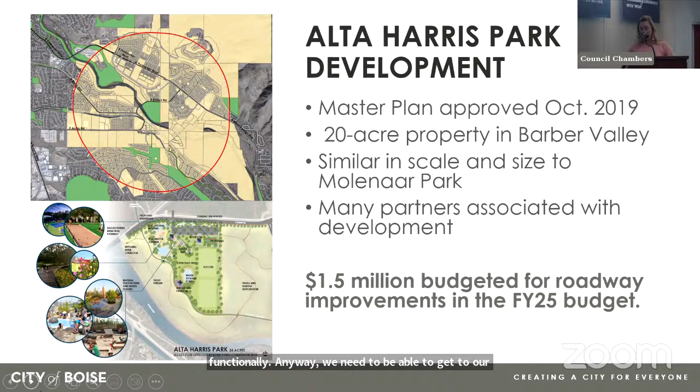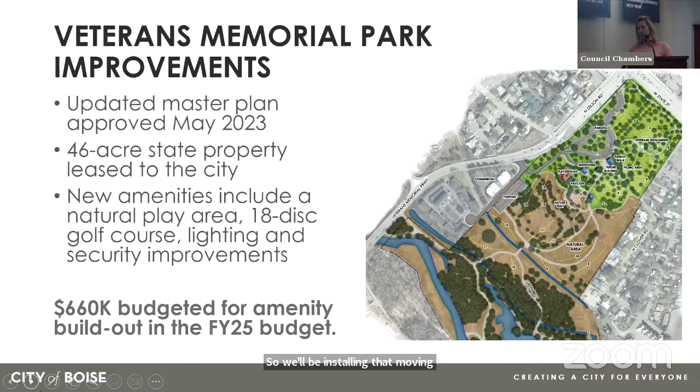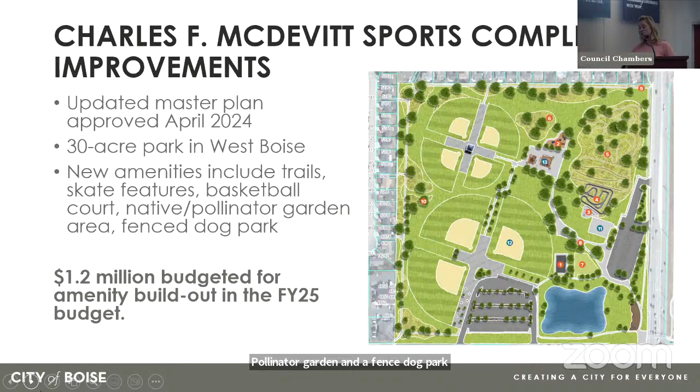And on the major R&M side, the major repair and maintenance or enhancements of existing parks, we identify those priorities based again on condition or age of infrastructure. Fairview Park has one of our oldest playgrounds. It's hard to get replacement parts for this playground because it's no longer manufactured. So we will be replacing that 20-year-old playground, both of them actually, and improving accessibility to the site.

That's one of the other things we would like to do moving forward with any enhancement, is looking more holistically at these amenities to make sure that everyone can access them. So accessibility and inclusion elements will be added not just to the playground, but around to the courts and around to the bathroom. So we're really looking forward to this improvement. It's a lovely park, and I love investing in our existing parks.

And I went through that kind of quickly. It's only 10 minutes, so I apologize if I was too fast. I'm happy to answer any questions you might have.

Madam Chair, just a question for you, Sarah. A quick update on Peasley, maybe, and on the Goddard Street Park that are under construction now, and an update for the commission on where those are at.

Yes, they are both under construction now, and I am accessing information. Hold on a minute. I'll start with Goddard. The pathway has been poured, and we are putting in some of the seating elements. And with any of these projects, we always run into challenges. So my team's working really hard to work with the contractor to make sure we get what we asked for. But they're both progressing really nicely.

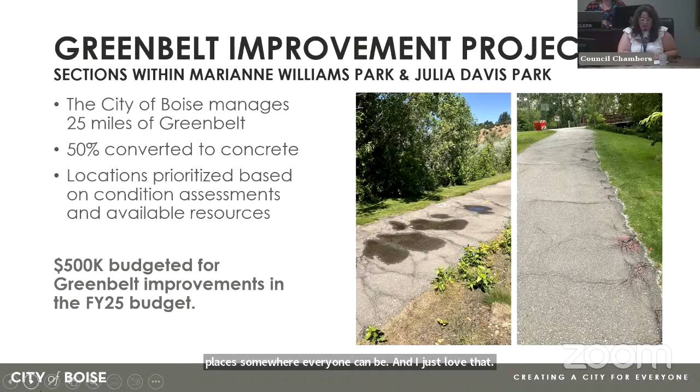This was an informational only item, so it's not something we're voting on. So our next item on the agenda is the pool update.

Madam Chair, Commission members, thank you. I want to also acknowledge Madam Chair for pinch hitting today. We appreciate that. She's a former president, so she can handle that as we need her to step in. I will, Commissioner Burnham, have Joey or Brenda send out a link to you.

We did a quick presentation for council on the Greenbelt, very high level. It was more related to some of the things Ada County was looking at doing. We wanted to clarify some confusion that had come out with some of the information over the 4th of July weekend on speed limits and language, and a joint powers or grant of authority agreement between all the jurisdictions to act on behalf of that jurisdiction in their own areas.

So if you were chasing somebody for an issue in Garden City, you didn't have to let them go, you could continue to pursue it if there was an issue on the Greenbelt. I'll have them send the link to the presentation that myself and Chief Weininger did on Tuesday for the mayor and city council. In that presentation, you'll hear there are some other things coming forward on the Greenbelt. So we propose to bring more details, more stakeholder involvement, more strategic planning on the Greenbelt.

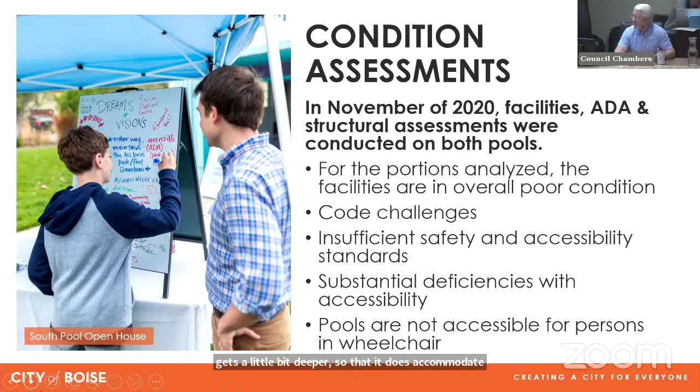You still have a 3 foot depth where new pools now either have some sort of staired area where you have a shallow end, or have what's referred to as a zero depth, so that you can basically walk in like you would on a beach, and it slowly gets a little bit deeper so that it does accommodate all abilities. Or you would have a kiddie pool component so that smaller children would have a place to go.

So again, I mentioned the contractor, that was CM, a local contractor. The design specialist was Aquatic Design Group out of San Diego, and then Cushing Terrell was our architect. They went to work, took some of the analysis that had been done in 2020, did a complete different analysis on their own, combined the two, and really came up with some options that we could present to the mayor and council.

There are site constraints. Both of these pools are located in what most people perceive as school property, but the city actually owns the dirt underneath the property that's located on school grounds. Go figure, but it's kind of one of those weird ones. We have that at Fairmont too, we have it at a couple other locations actually.

But you can see the site constraints are very considerable, there just isn't a lot of room to work with at both locations. But it's amazing what contractors can do, and they came up with a couple of plans that were actually pretty acceptable in how we could utilize both sites.

So the alternatives, we came back with council. Both pools have options for renovation, so both could be brought up to code, all the plumbing, the electrical, all the mechanical repaired, ADA compliance put in place. All that could be done for both pools.

However, only one pool, South, could actually be rebuilt on its own site. Lowell has a weird shape of the property, coupled with a flume that runs just beyond the property, and limited space at this site. The school isn't a giant space like Whitney Elementary School, for example. It's pretty small, so we don't have a ton of access to extra space here. So we determined, working with the design team, that Lowell really didn't have an option on site. If you were going to do a new pool for that area, you'd have to find another location.

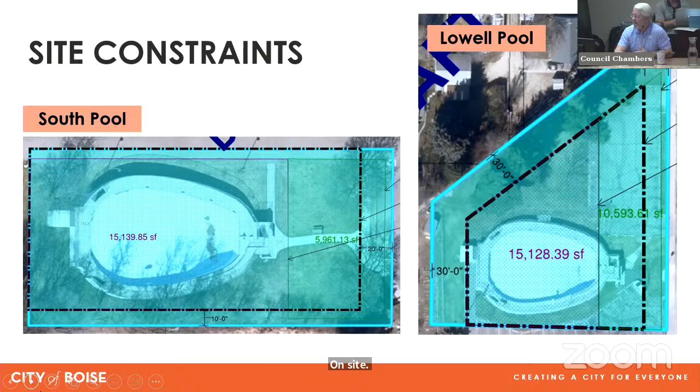South, on the other hand, does have the opportunity to be rebuilt on that site. As we presented to council, after receiving our marching orders, we're now in design, fast and furious working on designs right now. But at the time we presented this, everything was still on the table, and there's still a lot of work to be done over the next several months.

So the south alternatives: renovate the current facility, bring it up to code, add an elevator, as one option. Another option is rebuild a new pool at that site.

We don't just use our 10-minute walk initiative for park locations or open space locations, we use it for our recreation programming as well. Currently, where the South Pool is located at South Junior High, we have just over 2,000 residents and 868 households within that 10-minute walk.

So we began conversations with the Boise School District to see if there's an opportunity to go about five blocks southwest, across Overland at the corner of Owyhee and Overland, where Whitney Elementary School is located, and relocate it there. The school district was very amenable to that. Not only did they think it was a good idea, but they also had plenty of space there. The playground area is quite large, and their excitement was that their attendance at that school is primarily on the south side of Overland.

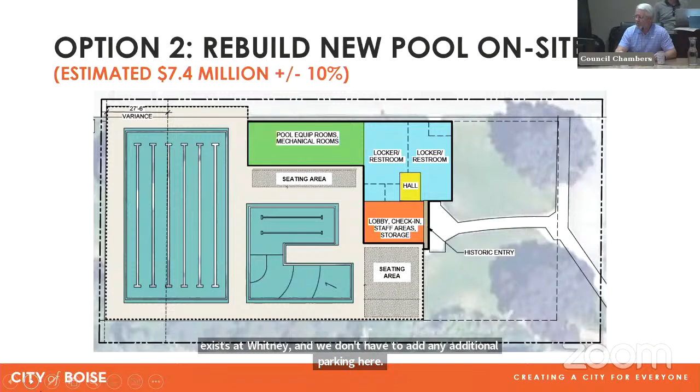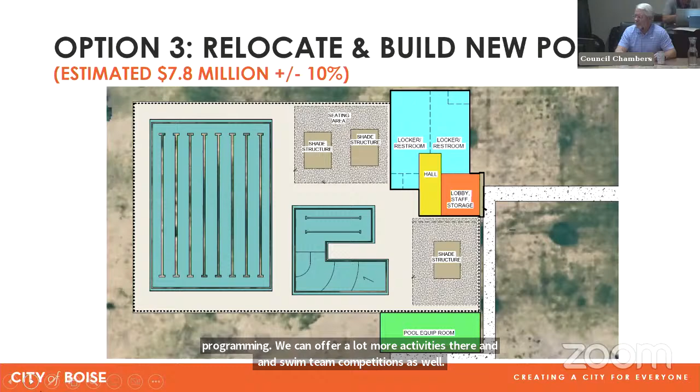But that way we can utilize the parking that exists at Whitney, and we don't have to add any additional parking here. So 7.4 if we rebuild at South, 9.2 if we just upgrade everything, or 7.8 if we build a brand new pool at another location with more household access and a larger footprint. And with an 8-lane pool, we can also do a lot more programming—offer more activities there and swim team competitions as well. So I'm just kind of kicking through this. If you have any questions, please let me know.

We'll move on to Lowell. As you saw several slides ago, Lowell really has one alternative because of the site constraints we have there, and that is just to renovate the pool. So that was our recommendation to the mayor and council—to take the existing facility and bring it up to code. The number of residents is actually pretty good; we have over 3,200 residents within that 10-minute walk. It is in a historic district overlay, so it has some deeper restrictions on what you can and can't do at that location. We'll have to work closely with our historic folks to make sure the things we're doing to the pool still fit within this historic district overlay.

So the only option is to renovate, and it's similar to South—we just flipped the storage side at the bottom with the lobby. So you still come into the lobby area, but now you'll go to the right. And when you get to the back side, you'll have access to both the men's and women's locker rooms, as well as a family locker room.

There will be a stairwell up to the top deck, or an elevator, with storage on the other side. Again, this will have all the other chemical rooms and storage rooms, all the things you saw on the South model, in this back part of this model as well.

This does require us to move the community garden that the school has at this location. We've walked the site with the principal and with the deputy superintendent, and we've got a plan on how to move that for them. So we're just going to push it back towards State Street a little bit more and take up a little more room back there.

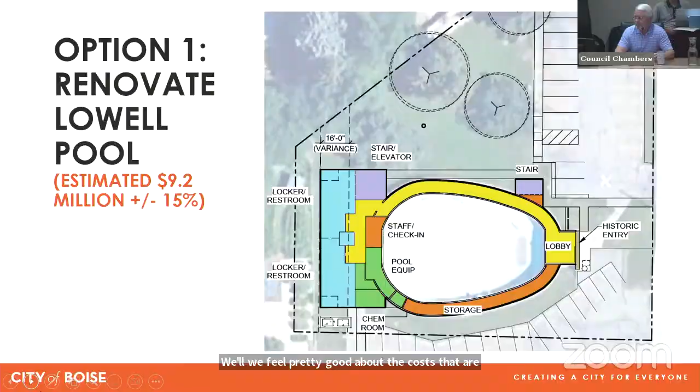So the direction from City Council was to renovate and bring the current Lowell Pool up to code. At South, relocate that pool to Whitney Elementary School, and seek community input on the reuse of the existing South Pool structure. At the same time, we'll also be seeking public input on the components of what the new Whitney pool will look like. So we'll be doing community outreach on the different amenities we'll be proposing that fit within the budget, and get input from the community on what they would like to see.

Right now, at a high level, it would have some sort of slide in the large 8-lane area. That's probably the only amenity you'd have there. And then the kiddie pool will have a number of different toys that we'll have there as well. So there isn't a ton of input we'll be seeking, but more of just really making the community aware of what we're doing, and seeking their feedback on what they would like to see.

This is a project of my heart. I live right next to South Pool, probably less than a minute walk. We haven't had a pool in our neighborhood for many years. It's been a big point of conversation. My kids used to be lifeguards there. A story I tell about South Pool is when I first tried to go, I had a 4-year-old, 2-year-old, and 3-month-old. I wasn't sure how this pool was set up.